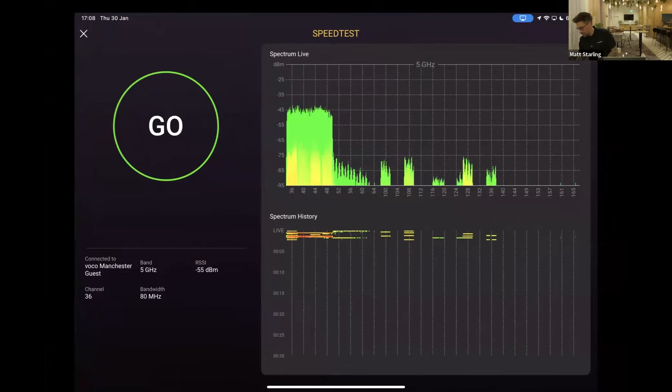Thank you, Dale. And what I've got running here, I've got my Sidekick 2 down here connected to the Ekahau Analyzer application. And I really wanted to understand, not only is the Wi-Fi good here, but also what are the backhaul speeds like? Because having great Wi-Fi is one thing, but if you've not got great internet speeds, then it's not going to be good to do this kind of webinar. So I fired up my Analyzer application and I run a trusty speed test, and you can see in a second how the Wi-Fi looks.

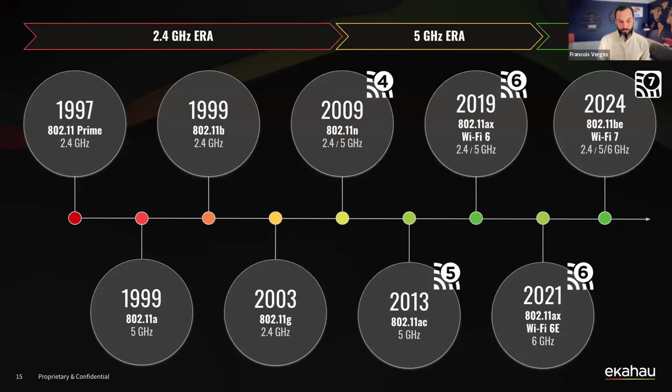So one thing that we also like to understand when we talk about Wi-Fi is the radio frequency aspect of it. So Wi-Fi is the RF technology. If you look at the standards, it's actually specifying the layer 1 and layer 2 specification of the protocol. So layer 1 is important, and layer 1 can be a little different from what we're used to in the networking industry. So that's why we like to better understand that RF piece.

And one thing that we talk about when we talk about Wi-Fi and RF and the RF signal, the Wi-Fi signal, is on top of talking about frequency, we also talk about amplitude. And amplitude is pretty much the power. How much power is the signal carrying?

Why do we care about amplitude in Wi-Fi? Well, we care about amplitude at different levels. We care about amplitude when we talk about the receiving signal. So in Wi-Fi, we talk a lot about signal strength, RSSI, received signal strength indicator, and this is pretty much the amplitude of the signal when the device is receiving that signal. So we want to make sure that that amplitude is high enough so that the Wi-Fi device receiving the signal can actually understand the Wi-Fi signal. So this is one piece where we'll talk about amplitude.

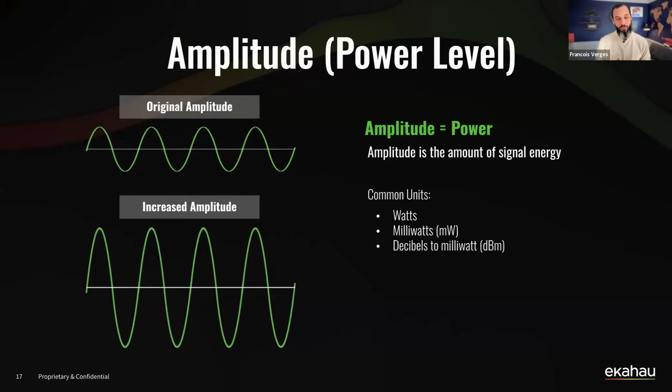A question that we get sometimes is how much power do we use? And this is usually related to the transmit power of our access points. How much power do I need to configure on my APs? Because we are limited in terms of transmit power by what the regulation allows us to do.

But it's also usually not a best practice to use the maximum transmit power allowed by the regulators for a few reasons. And one of the main reasons is that you don't want to end up in a situation where your access points are just yelling out the signal so the clients can hear them really well, but then the clients do not have the same capability of talking back as loud, and then the AP doesn't have that same level of signal coming back and might not be able to hear the clients.

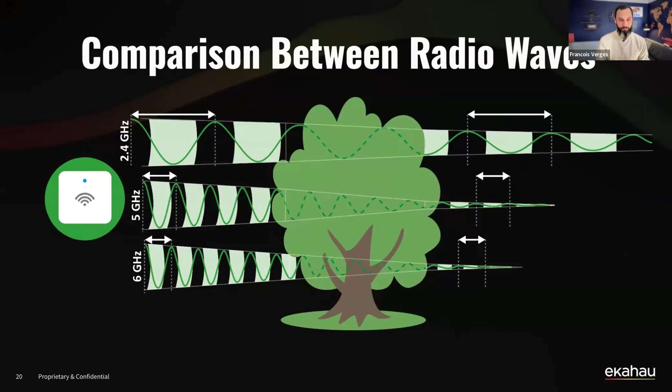Okay, another thing that I wanted to talk about here is a couple of metrics that are important for us in Wi-Fi. In Wi-Fi, to express the strength of a signal that we're receiving, we use the RSSI metric, received signal strength indicator, and that gives us how strong the signal is, right? But that's not the only metric that actually matters for us in Wi-Fi.

On top of understanding how strong the signal is, we also need to understand the separation between the noise on a given frequency or channel and the signal that we're receiving. And the more separation we have between the two, the easier it's going to be for the Wi-Fi devices to decode the message, right? And that separation is what we call the SNR, signal to noise ratio. So the more separation, the better it is for us.

And that's going to impact the data rates that we'll be able to maintain on a Wi-Fi connection. So the higher my SNR is, the more separation I have between my noise and my signal, the higher data rates I'm going to be able to support on that connection. So if you want your clients to go as fast as possible, you need to provide them with a good SNR, okay?

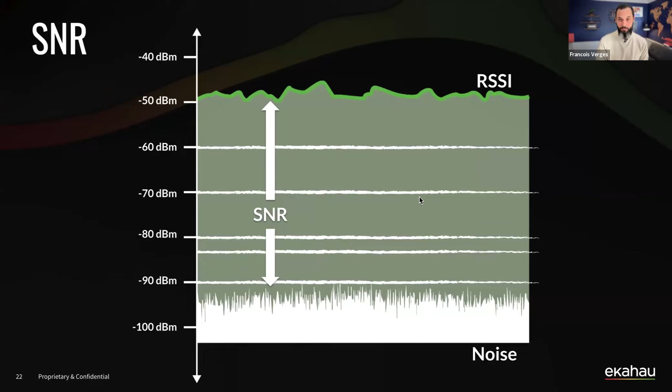But I'm also going to be using a longer time to send my data on the channel, and that will slow the traffic for everyone else that's also using that channel, right? So it's like a double-edged sword here. It's like, I have a slow connection for me, but I'm also slowing down the connection for everyone else, right?

So you could picture a one-lane road here, and then you can picture having a very old car driving on the road, and they cannot go more than 50 kilometers per hour. And so the car is going slow, but then it's also slowing everyone else that's behind the car that can't pass the car. So if you're behind that car, you can't go faster. All you have to do is wait for that car to be done, to turn left or right before you can start going faster.

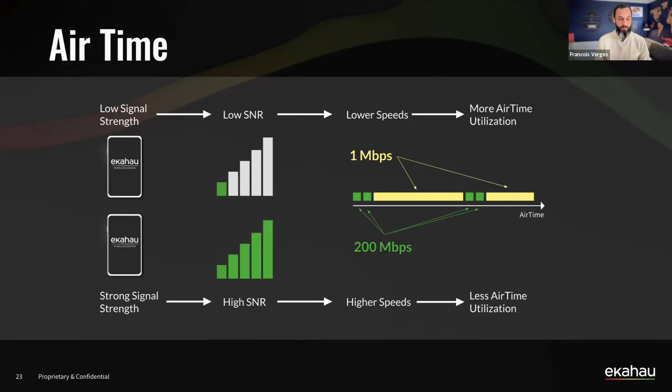the capacity of the Wi-Fi network. So when we design Wi-Fi, usually what we try to do is we try to provide a high SNR to our clients as much as possible. So they can be on and off the channel as fast as possible, and they can have fast connections in the end.

Now, when we talk about Wi-Fi and frequencies, we also have to talk about channels, right? Because we have some regulations that we have to follow, and we have some rules as well, best practices that we have to follow in order to make sure that we're not sabotaging ourselves.

When we talk about Wi-Fi, we like to think that outside interference is usually killing Wi-Fi, but most of the time, if we look at most of the Wi-Fi networks we work on and troubleshoot, we find out that Wi-Fi is sometimes the biggest enemy to Wi-Fi. Right. And sometimes if we don't do it properly, our own Wi-Fi can be our biggest enemy. So understanding the channels, understanding how to configure the channels can prevent you from creating your own interference and can help you make sure that you're building a better Wi-Fi network.

So 2.4 is the first frequency band that we can use in Wi-Fi. The size of the channel that we use in Wi-Fi is 20 megahertz or 22 megahertz, depending on which data rates we use. The modern technology tends to use 20 megahertz wide channels. So if we take a look at the entire frequency band that we have, it means that we can only use 3 non-overlapping channels. And these channels are typically 1, 6, and 11.

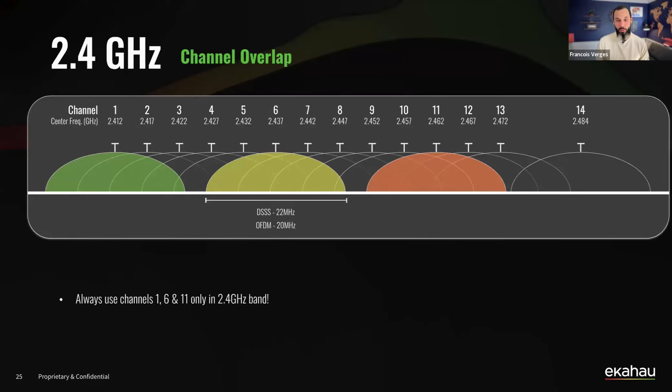So we use 1, 6, and 11 because that guarantees that we do not have any overlapping between our Wi-Fi channels. And that also guarantees that we play nicely with the other wireless technologies that are now heavily using 2.4 gigahertz. And I'll show you that in a bit. But here I'm talking about BLE for the most part, because BLE is using 2.4 quite a bit, but they work around the 1, 6, and 11 channels. So if you do not want to have any problems, or as few problems as possible, you can stick to 1, 6, and 11 on the 2.4 frequency band.

And what happens here is that if you have one AP on channel 3 and one AP on channel 6, if my 2 APs start talking at the same time, they will actually interfere with one another on that piece of spectrum that they're sharing. So that can introduce some retransmissions, and that can alter the Wi-Fi communications. Okay, so how to avoid adjacent channel interferences? Easy, just stick to 1, 6, 11.

Okay, then you're going to tell me, what if I need to install more than 3 APs, right? Because I only have 1, 6, and 11. What about the 4th AP that I need to install? Which channel do I use? Well, what's going to happen usually is that if you have to install multiple access points, 50, 100, you can end up with multiple access points sharing the same channel. So you could have a case where at one given location, 3 APs are using channel 6.

And what will happen in this case is that the APs are not really going to interfere with one another. And that's because they are operating on the same channel. So since they're operating on the same channel, if one AP starts communicating, the other APs will actually see these frames and they'll understand that the first one is communicating. So they're not going to try to talk at the same time. They're going to take turns. So it's not really an interference per se.

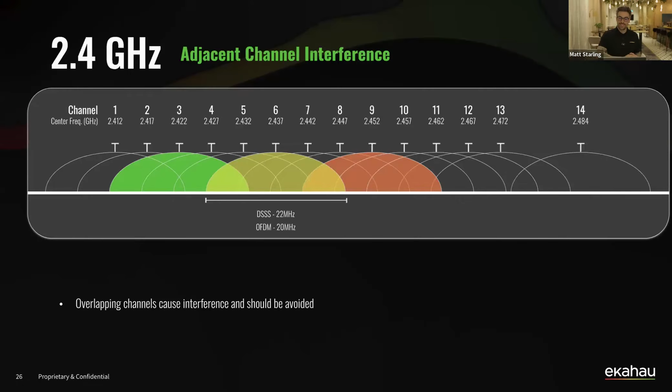Yeah. Thanks, Francois. And there's just one other thing that people in the chat are insisting that I tell you: that you're the best. There's lots of people in the chat that have been in one of your classes before, or maybe listened to you on your Clear to Send podcast, and they insisted that I let you know that they think you're the best. Thank you. I appreciate that. Maybe it's the French mafia, you know.

Thank you guys. I appreciate that.

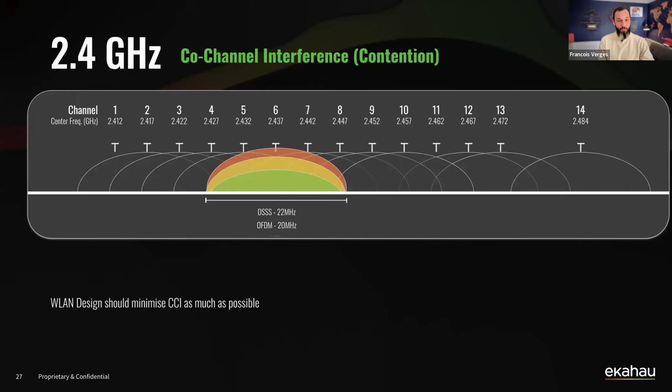Okay, so co-channel interference. Yeah, this is going to happen, especially on 2.4. If you've done a little bit of Wi-Fi, you've probably seen it, you've probably measured it, but we're going to have co-channel interference in 2.4. The goal usually is to minimize it as much as possible. And this is something that we can, most of the time, work around on the other frequency bands, 5 gigahertz and 6 gigahertz. Why? Well, let's take a look at 5 gigahertz.

Another thing that works in our favor on 5 gigahertz is that we have enough separation between our channels to not have any overlapping. So I can use channel 36, I can use channel 40 without any overlap, so without any problems. So I can actually use all of the channels that have been defined on that frequency band. So the ability to have more spectrum, that's good because that means we don't have to reuse that channel as often, so less co-channel interference.

But that also means that we can start innovating. And one of the innovations that came with Wi-Fi was channel bonding, a feature that lets you take 2 adjacent channels, bond them together, and now you have a larger channel. And what would be the advantage of a larger channel? Well, you can transmit more data and you can have higher data rates. So by having more spectrum, we can potentially increase the data rates on our Wi-Fi networks, which is a great benefit of having more spectrum.

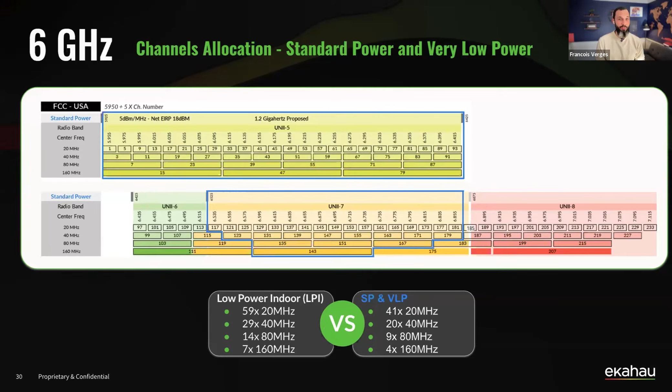For 6 gigahertz, I know that in Europe right now, they only have access to UNII-5, which is pretty much 500 megahertz. So it's like getting another 5 gigahertz. I believe it's 24 channels. But you can see that they're trying to push access to more spectrum so we can actually increase the data rates we're using over Wi-Fi.

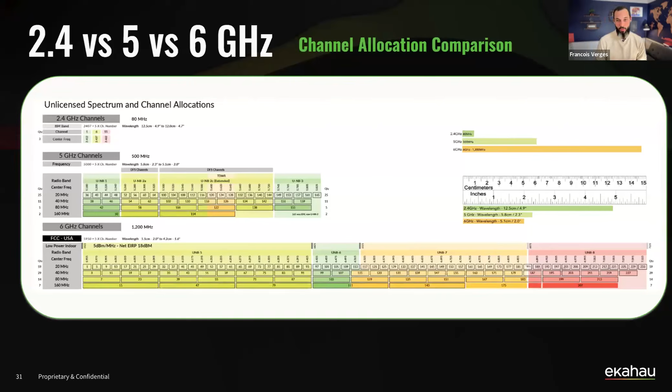Okay, so a couple of other things as well that I wanted to talk about here is what happens to the signal when the signal leaves the access point or the transmitter and is being transmitted in your environment. One aspect of Wi-Fi that is important to understand, especially when we work with Ekahau, is what we call the free space path loss.

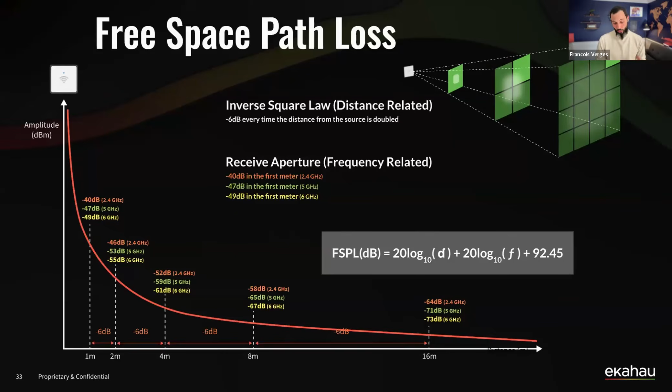But this doesn't take walls into account. This is a free space. So if you have wall attenuations and so on, you have to model it in Ekahau. So Ekahau can take the free space path loss and the wall attenuation into account to model the environment for us. So this is what you have here, right?

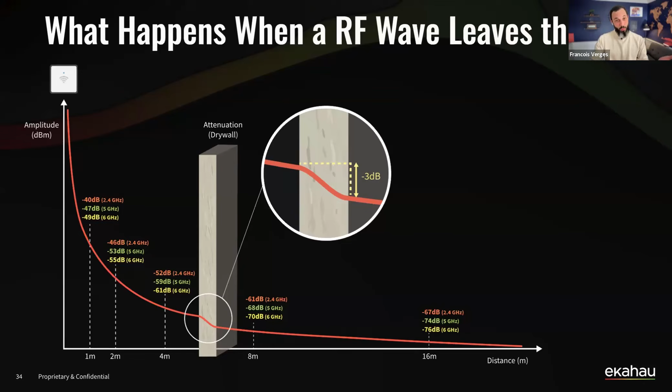If you have a wall, and we're going to draw the wall in Ekahau, Ekahau will calculate the free space path loss before the wall, add some loss to it, and then free space path loss after the wall to model the environment. And it does it in 3 dimensions. So you can actually look at how the signal is transmitting on a horizontal plane, but also on the vertical plane. Other things that we could also model are reflections.

So what's going to happen to the signal is, some of that energy might bounce against some surfaces that are a little bit more opaque, and some materials will bring more reflection than others. But some of that energy might come back into a given space. And in Wi-Fi, we usually talk about metal, and we say that metal is reflecting the signal, and sometimes we could have the signal bouncing around, which makes it a little harder for the receiver to actually decode what's going on. But we can also think about reflections by other material.

If you work a lot in warehouses or manufacturing plants and they have big concrete floors, that could also reflect the signal, or a concrete wall that could reflect the signal a little bit. And sometimes you can see it when you measure it in Ekahau. So you can take that into account when you're doing your survey, when you're measuring the signals. But this can also be taken into account in the modeling in Ekahau.

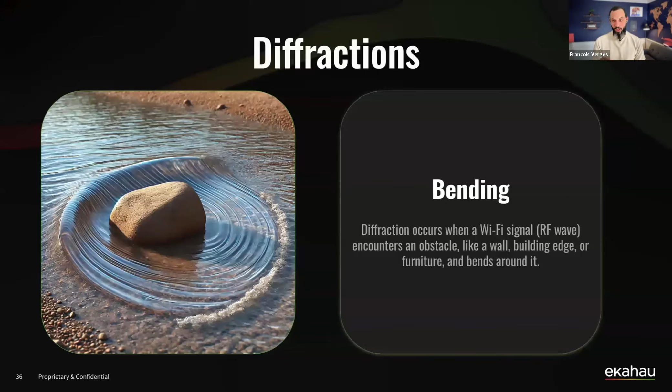Diffraction also is happening, and diffraction means that the signal is bending around an object, it's going around an object. And in Wi-Fi, this is usually what will happen if you're designing in an open space that has pillars. So let's say you have concrete pillars in an open working space, then the signal will bend around those concrete pillars. And this can also get modeled in Ekahau. And this is nice because it allows you to have a better representation of what the signal will be in the real world from the model. So reflection and diffraction can be used by Ekahau to give you a simulation that's closer to reality.

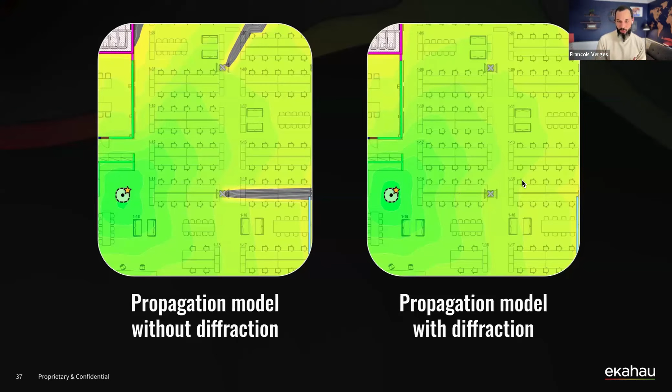So here you have an example of the pillars being modeled. On the left, you can see that the diffraction model is not applied. So you can see that there's some sort of a V-shaped shade area that's created behind the pillar. But then if you enable the modeling of the diffraction, you can see that the signal is actually going around that pillar. So as long as you don't place the AP too close to the pillar and you leave some room for the RF to breathe, then you shouldn't have to worry too much about that pillar.

Why don't we take a look at it in Ekahau? Sounds good? Okay. Sounds very good.

Okay, so what we'll do is I'll show it to you in Ekahau AI Pro Online. But I'm going to start from Ekahau AI Pro so I can show you the new feature of importing an existing project into the new online platform. So I'm going to jump into Ekahau. Matt, do you see my screen?

Awesome. Okay. So this is pretty much Ekahau. If you guys have never seen Ekahau, this is what it looks like when you open it. And I'm going to use the design tab because I'm just going to do a quick design here. And the first step in the design is to add the floor plan. So I can click on add, and I have the floor plan ready here on my desktop. And so this is the Ekahau offices in Finland.

I have imported the image, and now I have to scale it. Ekahau is kind of guiding you a little bit because the scaling tool is the only one you have available here. I have a scale here on the image, which is convenient. So I'm just going to use that to scale to 10 meters. And then once my floor plan is scaled, now I can start modeling the environment. I'm actually going to let the online tool model the environment because it can do it automatically.

But what I'm going to do here is I'm going to define the areas, the requirements areas, and the coverage areas. So I'm going to go in the area tool, and I'm going to define an area for the offices. And here, Ekahau, they're not using the entire floor for the offices. So I'm just going to go around the building here, selecting this area.

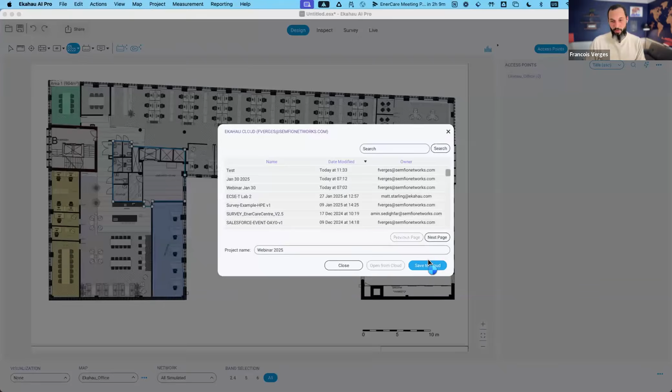Okay, and then once I have this, I won't do too much more here. I'm going to save it, and I'm going to save it in the cloud. And I'm just going to call it webinar 2025. And what this will do is it will just take my project and upload it to the cloud. And this is good.

And so now I can go back into my browser, and I can go into my Ekahau Cloud account. And here I can go on the Ekahau AI Pro online tool. It will show me my project here, but I'm actually going to click on create a new project. And this is where you have the new feature for today, where it's asking you if you want to import from an existing AI Pro project. So I'm going to say yes.

Maybe I should give it a name here. Okay. I can choose the regulatory domain. I can choose the site, and then I'm going to continue here. And it's going to show me all of my projects. I'm going to select the one that I've just uploaded. And here, it will import the floor plan, the scale, the areas, pretty much anything I've done in Ekahau, and it will put it here into Ekahau AI Pro Online.

And you can also notice that it's detecting the walls for me. So now it's running an algorithm to detect the walls from the image. It takes about 15 seconds, and then it will allow me to place the walls automatically, so I don't have to draw everything. And you can see that different wall profiles with different attenuations already exist.

And so here I can click on place walls, and it will just place the walls for me. So I can kind of see what it looks like. If I'm not happy with different areas, I can adjust it. Here I noticed that they added walls for the legend, so I can actually delete them.

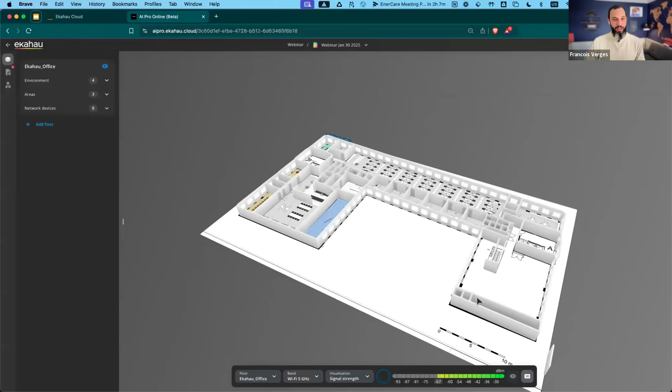And then if you want to go fancy, you can go 3D, right? And you can take a look at what the walls are. It's pretty good, actually, and especially that I didn't have to draw the walls, right? So it's even better.

Okay, and then here you can also see that we have our areas. So if I take my area here, I have this area, and it goes back to my area requirements profile, and I can take a look at what this means. And you can see that here for each frequency band, we're going to have minimum thresholds being set to meet some of the Wi-Fi design requirements, to make sure that we have enough signal, secondary signal, SNR everywhere, to make sure we have good Wi-Fi. So this is great.

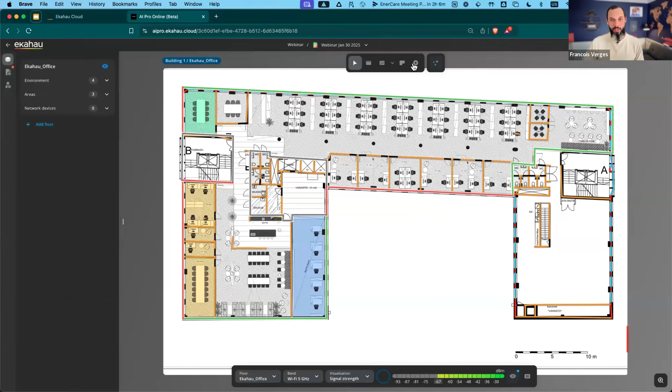Okay, so now what if I place an AP? I'm going to go to the device tool, and I'm going to place an AP. So I'm going to go and get a Wi-Fi 7 AP. I'm doing design right now with this one, so I'll grab this one, and then I'll place it. I'll place one here, and you can see that as soon as I place it, it calculates the signal propagation from that AP.

So how does it calculate this? Well, it uses the free space path loss. How do I know it uses the free space path loss? Well, I can put my cursor in any area, and at the bottom it shows me the signal strength in dBm. But what I can also do is, if I put my cursor on the scale at the bottom, you can see that it colors the heat map and shows me which areas in this case provide a signal greater than -54. And you can see each increment is an increment of 3 dB.

And you can see that we also have little contour lines, right? And so here, if I look at my legend, we actually have 6 dB difference between my contour lines. This one is at -54, and this one is at -48, 6 dB. And the FSPL calculation is telling us that every time you lose 6 dB, you double the distance away from the source. So here, it illustrates that. You can see the distance between the AP and that contour line doubles when I go to that contour line, and this means that I'm losing 6 dB in the process. So Ekahau is using the free space path loss to calculate the signal propagation.

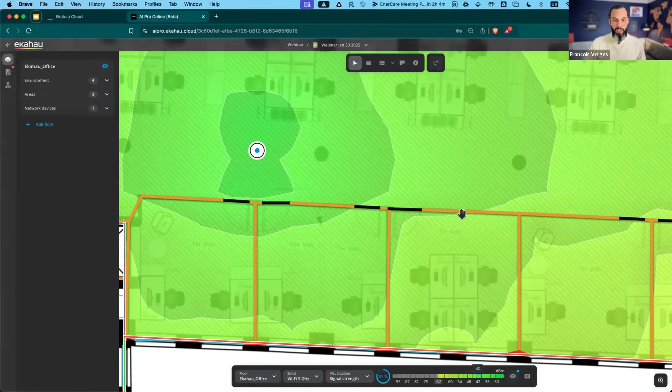Okay. So when I go to a wall, you can see that it's going to be a little bit more than the free space path loss, because now it's adding the attenuation of the wall. But then what if I zoom in on a pillar and we start modeling the pillar? Then maybe we can illustrate what the diffraction model will do. So I'm going to take a concrete wall, and then I'm going to really quickly here define a wall around my pillar.

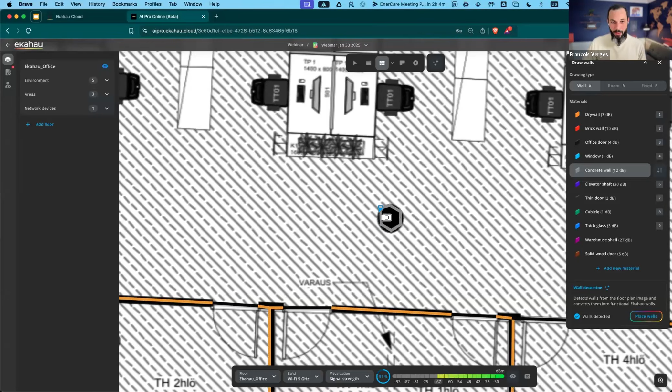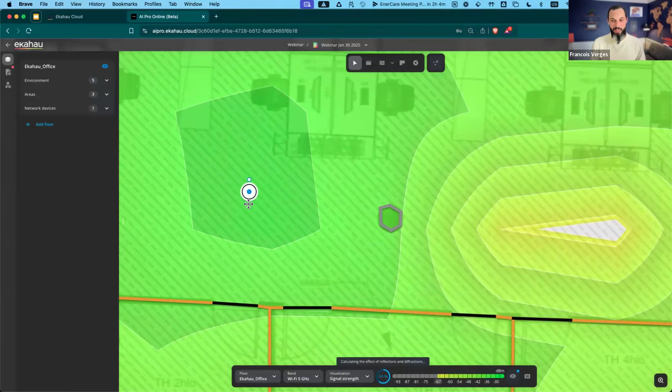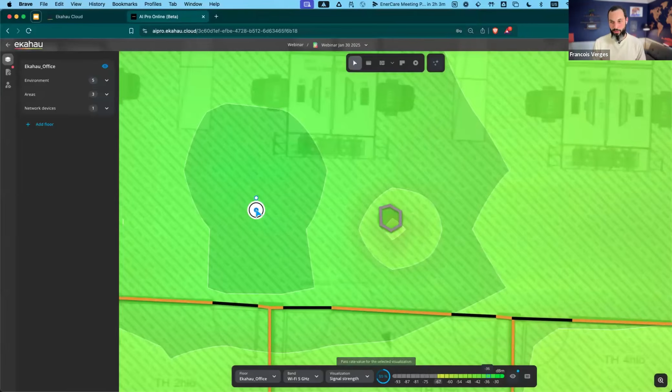Okay, and then if I go back up, I don't know if you saw it, but if I move my AP, you can see the big V shape because the diffraction model hasn't applied yet. But then as soon as I release my finger on the mouse, it calculates that diffraction model. And maybe I can zoom out to illustrate that a little bit better. You can see the impact of that pillar without the diffraction and then with the diffraction.

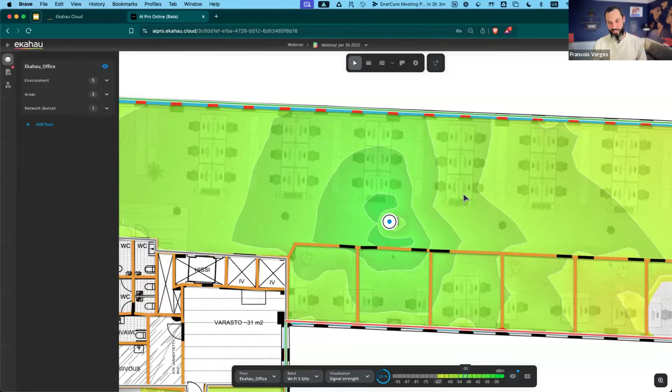So you can see that there's not much impact when you have the diffraction, unless I place the AP really close to the pillar, and then you have a little less signal, obviously, coming on the other side of that pillar. So usually for pillars, I give my APs a little bit of breathing room, to try not to install the APs too close to the pillars. And then if you have pillars like this, I try to install APs on both ends of the pillars, so at least you have good coverage. And if you do have to install the APs on the pillar, well, now you know the implications and you can model them.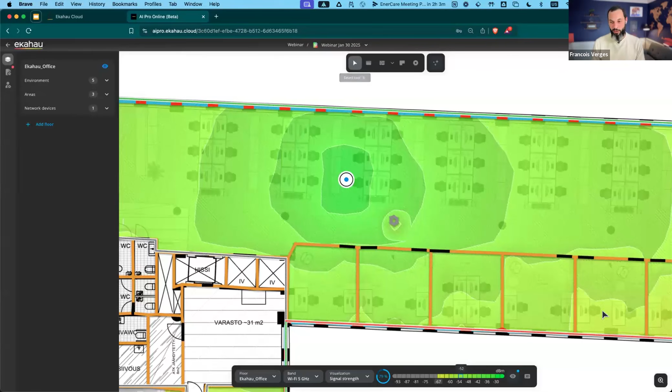Okay, and then here, I know I'm talking a lot, but here what I could do in this environment is I could actually go back to my device tool and I could place more APs. And you can see how Ekahau is guiding me into where I could place more APs if I want to meet my requirements. So here I clicked manually, but I could actually ask Ekahau to place my APs automatically, and it will give me a design that meets my requirements.

And then if I'm curious, I could always go back and look at 6 gigahertz. What's the secondary signal strength? What if I add an AP here? And then I can continue doing my design that way, making sure I'm meeting all of the requirements.

And then if I want to understand my channels, in Ekahau AI Pro, I could go first on the left and understand, based on my regulatory domain, am I using the channels that I'm supposed to be using? Here you can see that I have a little red dot. And if I click on the red dot, it's telling me that I'm actually using channels that I'm not supposed to use in Finland. So here I would have to disable UNII-6, 7, and 8 to be able to comply with my regulations. So I can pick and choose for all of the frequency bands which channels I want to use and which ones I don't want to use.

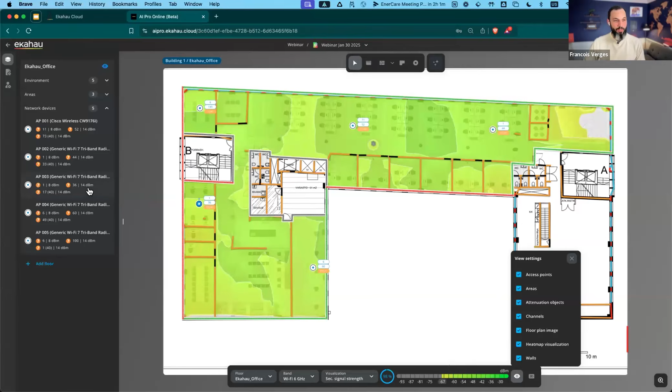And then if I go back and take a look at my network devices, I can take a look at which channels have been assigned to my APs, and you can see that Ekahau automatically assigned the channels. I can actually display them on the map here. It automatically assigned the channels and tried to optimize for co-channel interference, and I can study that here on this slide.